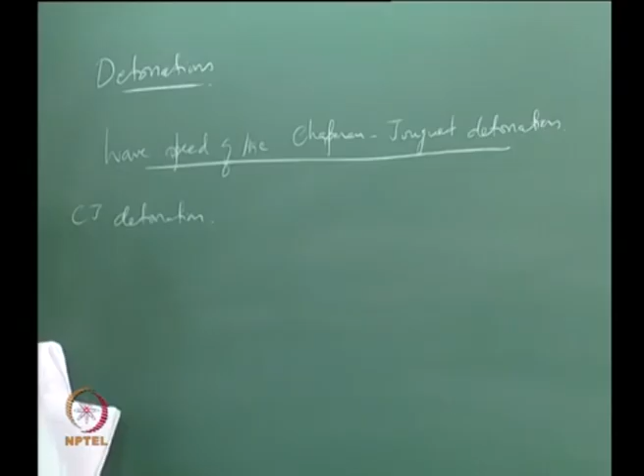We will just keep going, looking at the kind of analysis similar to Rankine-Hugoniot analysis, and then see where we can try to exploit the nature of detonation to look for the wave speed. So for the Chapman-Jouguet detonation, in this context, the product speed is basically the speed of sound.

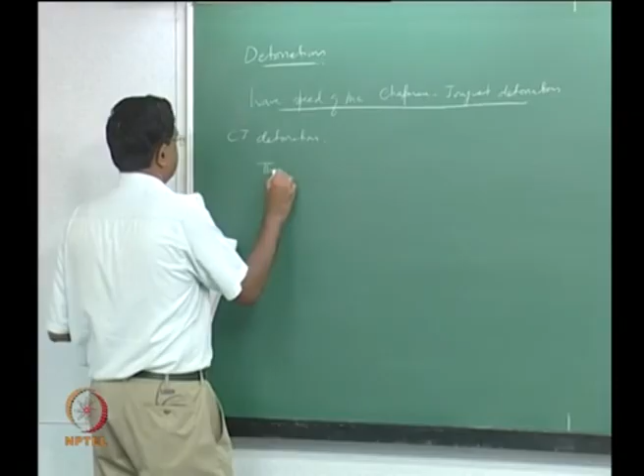So unlike, for example, in a normal shock where the downstream velocity is always subsonic when the upstream velocity is supersonic, in the case of a Chapman-Jouguet wave, the downstream velocity is always sonic, locally at the speed of sound. So the speed of sound behind the detonation wave is, using the same notation as before, A infinity equals the square root of the partial derivative of the downstream pressure with respect to the downstream density at constant downstream entropy.

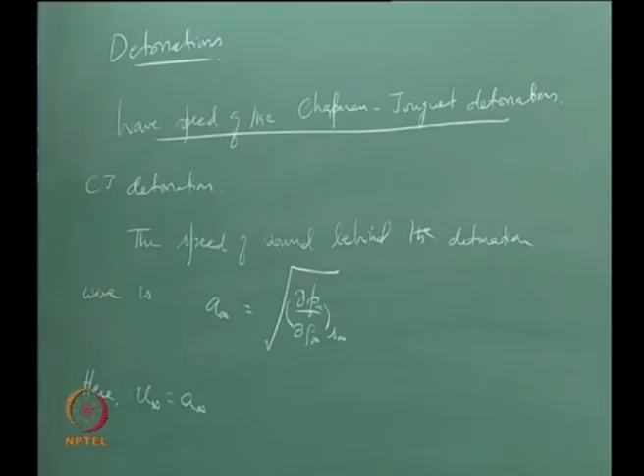Now here, u infinity equals A infinity at the upper CJ point in the Hugoniot curve. So we have m dot equals rho naught u naught equals rho infinity u infinity, which is now equal to rho infinity A infinity. So from here, u naught is equal to 1 over rho naught times rho infinity A infinity.

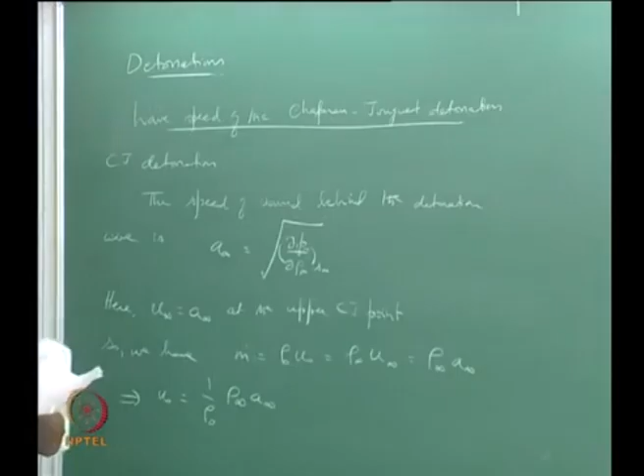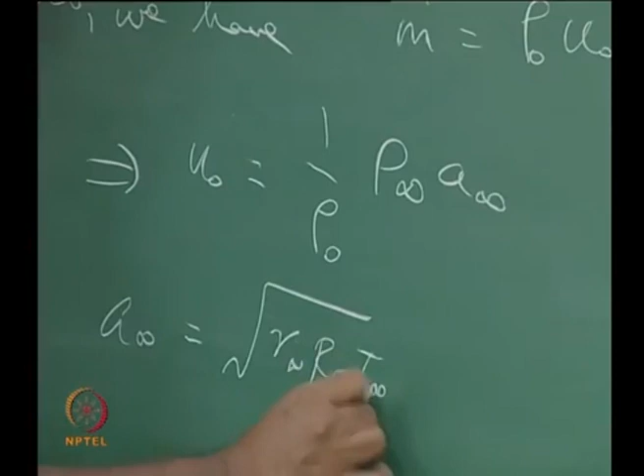Now A infinity equals the square root of gamma infinity R infinity T infinity. So u naught is equal to rho infinity over rho naught times the square root of gamma infinity R infinity T infinity, right. So let us call this relationship number 1.

So here the problem is, u naught is actually what we are looking for. This is very similar to what we did for the deflagrations. That is related to rho naught, also very similar to deflagrations, because there also we were trying to look for a relationship for m dot versus the rest, and m dot is rho naught u naught. But here what we find is the wave speed, which in a wave fixed coordinate system is essentially u naught, depends on the downstream quantities, rho infinity, gamma infinity, R infinity and T infinity, and that is the problem. So we now have to try to find out if we can evaluate those quantities.

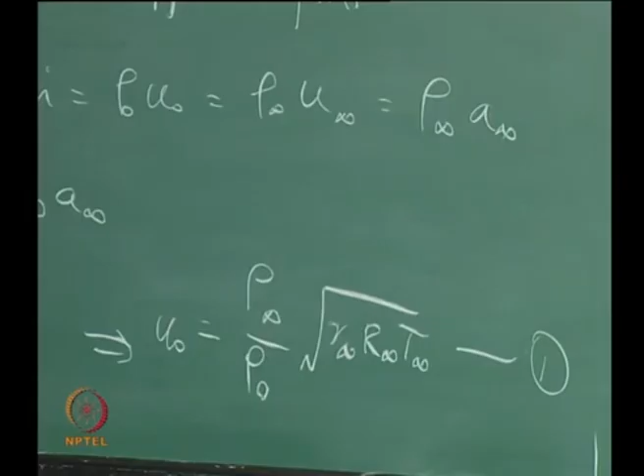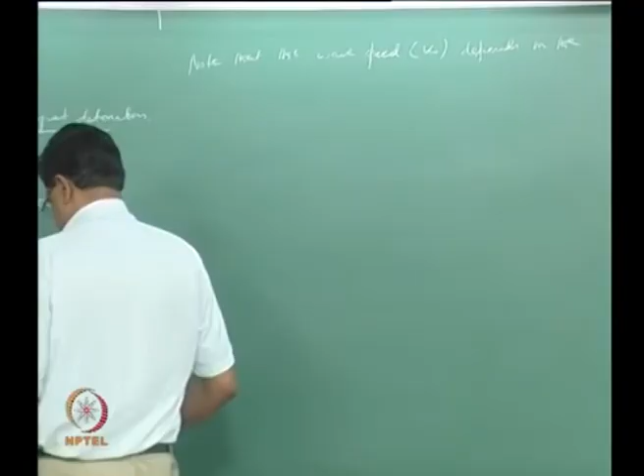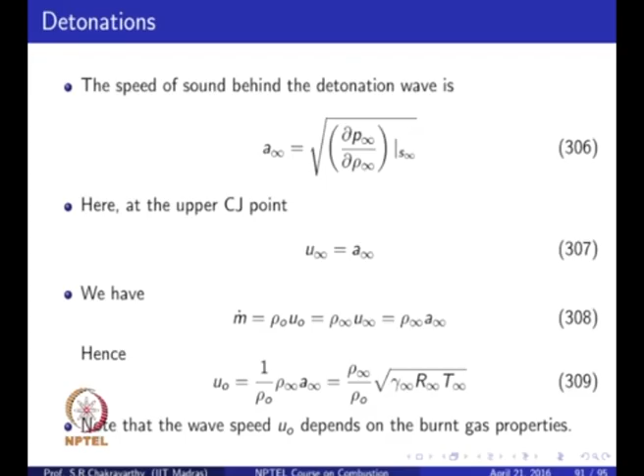So note that the wave speed, which is essentially u naught, depends on the burnt gas properties. As a matter of fact, we also know that, for example, at the lower CJ point as well, u infinity is equal to A infinity, and m dot being equal to rho naught u naught equal to rho infinity u infinity is valid regardless of where we are on the Hugoniot curve.

So if you now plug in u infinity equal to A infinity, that's valid for both upper CJ and lower CJ points. So strictly speaking, this could be a CJ detonation wave or a CJ deflagration wave at this moment. We haven't quite exploited the fact that we are particularly interested in a detonation wave at this stage. So keep that in mind and look for where we are doing this. What we want to do now is to chase the evaluation of the burnt gas properties. So let's try to do that.

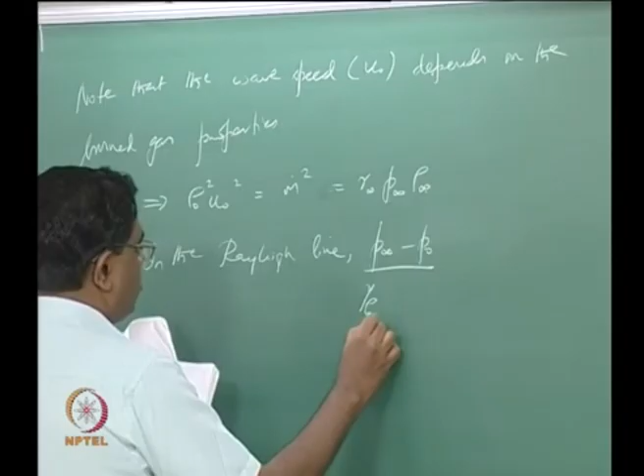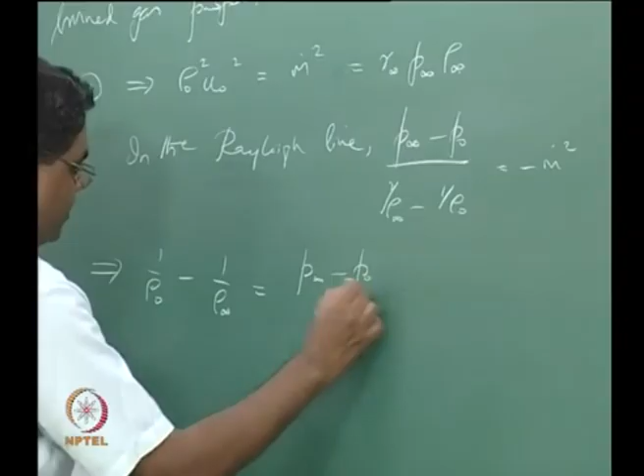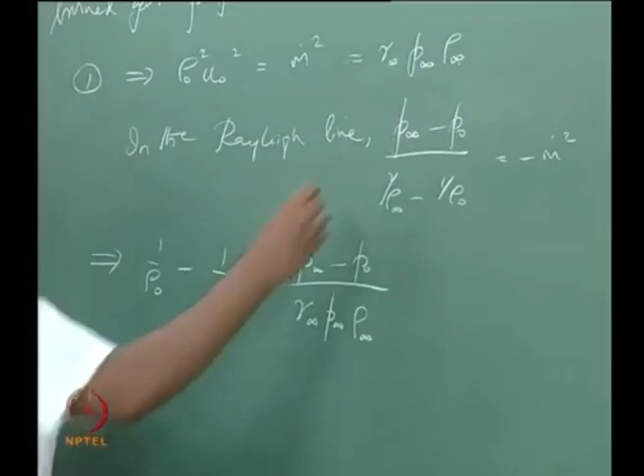One itself implies that rho naught squared u naught squared equals m dot squared equals gamma infinity p infinity rho infinity. You can get this quite easily. Now in the Rayleigh line, we have p infinity minus p naught divided by 1 over rho infinity minus 1 over rho naught equals minus m dot squared. Then we plug this in here. So from this we can get 1 over rho naught minus 1 over rho infinity; we swap this to get rid of the negative sign in the m dot squared. So that would be p infinity minus p naught divided by gamma infinity p infinity rho infinity. Let's call this 2, and this will be pretty important at some stage in the future.

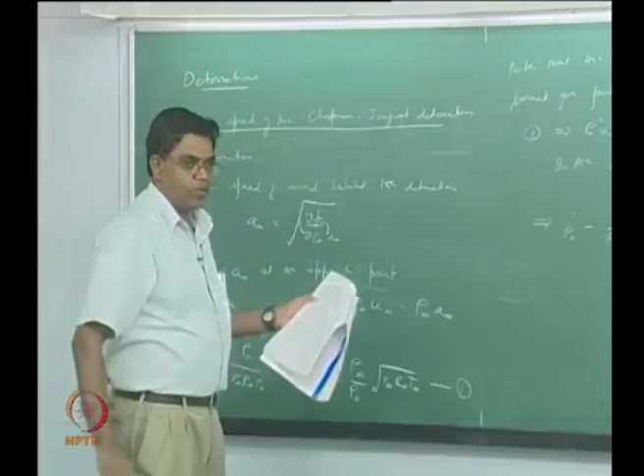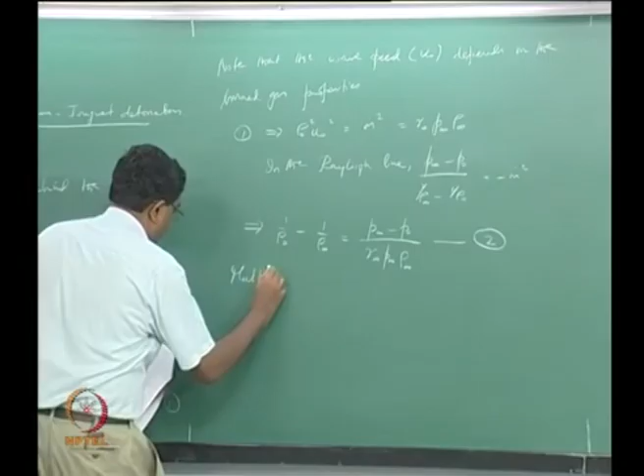From now on, we are going to do something that could be a little bit boring, but we will come back to this and say, well, we can forget about everything I said, which is complicated and boring, and just go back and look at this and see if we can exploit something here. So let me go through whatever needs to be gone through, and then we will come back to this. So here what we want to do is multiply above by p naught plus p infinity.

So we have p naught plus p infinity times 1 over rho naught minus 1 over rho infinity equals, we now get p infinity squared minus p naught squared divided by gamma infinity p infinity rho infinity.

So why did we do this? This is where we are now going to make the point that we are looking at a detonation wave. We have already made the point that we are looking at a Chapman-Jouguet wave, and we pretended to be doing detonation, but not quite yet until now. So what we want to do is to notice that across a detonation wave the pressure increases manifold, so many times, and therefore p infinity is larger than p naught, quite larger than p naught actually.

Now what we don't want to do at this step is to say that p infinity is much larger than p naught. So I used the words carefully there. I said quite larger than, not really much larger than. So if you now say quite larger than, then we can easily say that p infinity squared is much larger than p naught squared. So what we are going to do right now is to say, suppose p infinity squared is much larger than p naught squared.

This is much less of an approximation when compared to directly supposing that p infinity itself is much larger than p naught. Okay, so this is all right. But what we will find is this is not going to really help us directly. It's going to lead us to go into some circles, and then we will come up with an iterative scheme of solving this. So that's the boring part that I was just talking about.

And then I'm going to come back and say, wait, for an engineering purpose, can I relax and say I don't want to actually multiply by p naught plus p infinity here and then get p infinity squared to be considered to be much larger than p naught squared. Directly in 2, can I say p infinity itself is much greater than p naught, instead of looking at the squares. I'll do that quite some time later.

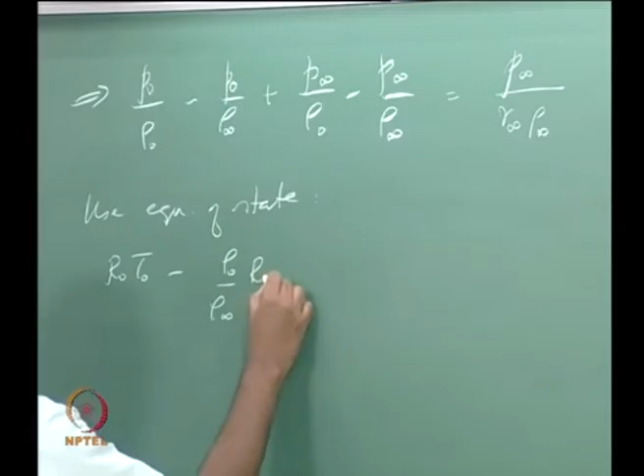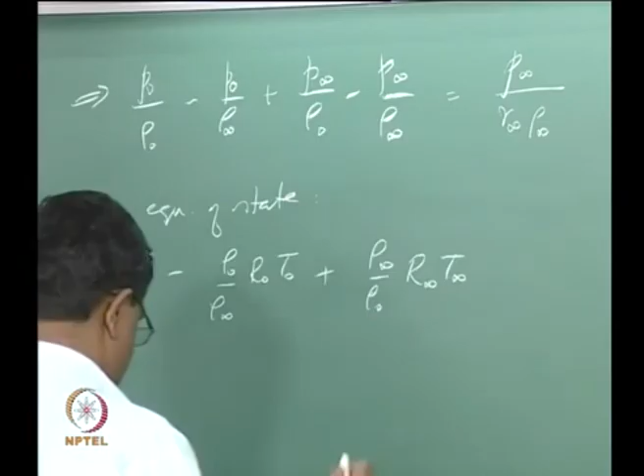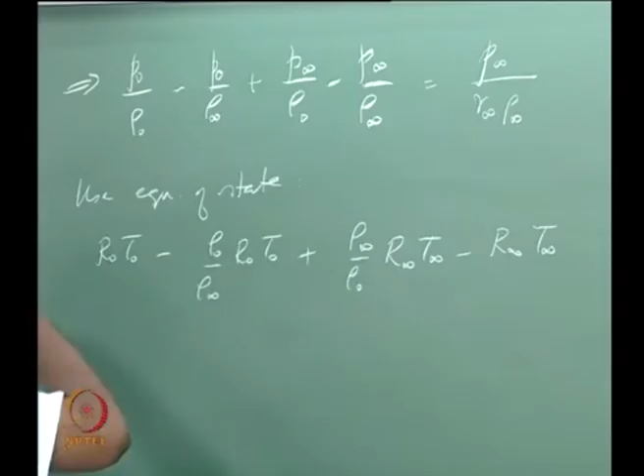R naught T naught minus rho naught over rho infinity R naught T naught plus rho infinity over rho naught R infinity T infinity minus R infinity T infinity. Wherever we have p infinity over rho infinity, we use R infinity T infinity; p naught over rho naught, we use R naught T naught. But for the mixed quotients, we take the ratios of densities and use the equation of state wherever applicable, so on the right hand side we also write R infinity T infinity divided by gamma infinity.

So multiply, this is the kind of boring part I was talking about, it's basically some algebra. Rho naught divided by R infinity T infinity, and that's going to get you a quadratic. You might recall doing something like this with the Hugoniot curve and the Rayleigh line put together earlier on to get the upstream Mach numbers, but here our goal is slightly different.

So we get rho infinity over rho naught the whole squared minus (1 over gamma infinity plus 1 minus R naught T naught over R infinity T infinity) times rho infinity over rho naught minus R naught T naught over R infinity T infinity equal to 0. Let's call this 3.

Now this is a quadratic in rho infinity over rho naught, right. But you see, what are the coefficients? The coefficients involve gamma infinity, R naught, T naught, R infinity, T infinity, right. So those are the coefficients there. So solving this will give rho infinity over rho naught in terms of gamma infinity, R naught, T naught, R infinity, T infinity, right.

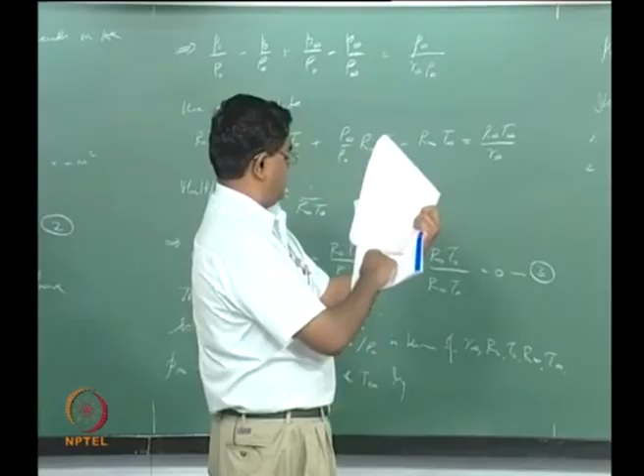The reason why we number these equations is we will now go through an iterative solution procedure. The first thing we do is assume a P infinity. We don't know what P infinity is, but let's assume it. And did I make a mistake? Right. P equals rho RT, so we need to have P infinity equals... is that right? I want to make sure I don't make that mistake, but I did. So assume T infinity. 3.

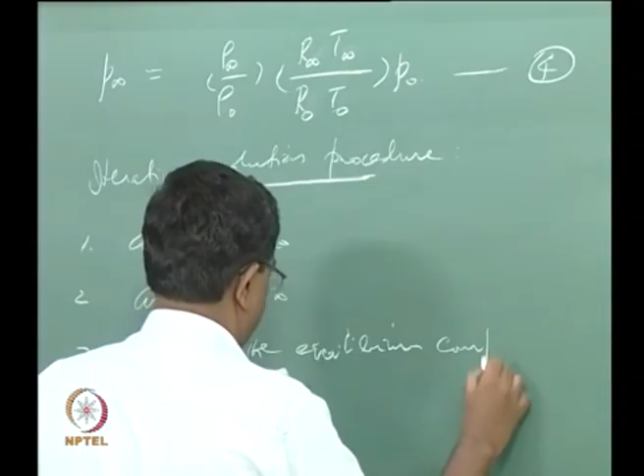Now the next thing we do is calculate the equilibrium composition Yi infinity based on P infinity and T infinity. That is, once you get to step 3 you have a P infinity and T infinity to work with, which you now use for the equilibrium composition there. And then once you do this you use the energy balance to check whether this is going to resolve things. So check for E infinity from the Hugoniot relation.

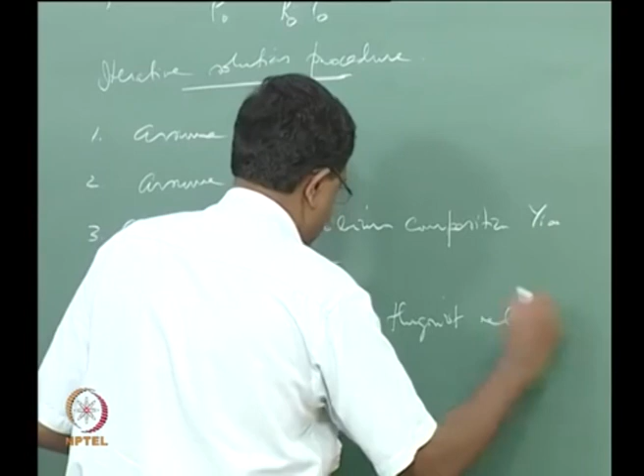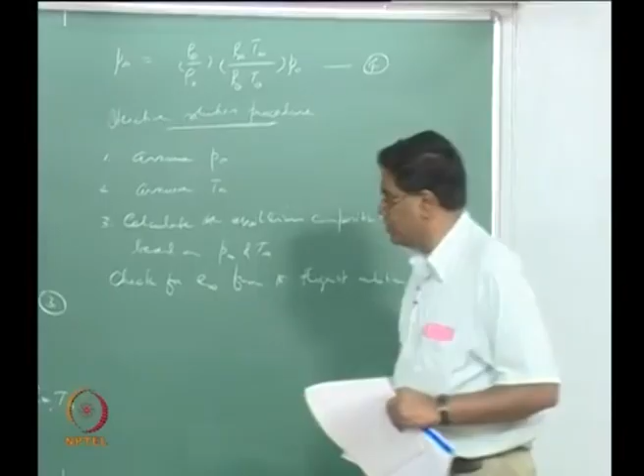In fact we had the mass balance here, and the Rayleigh line is a combination of statements of mass conservation and momentum conservation. That is what we have been working with. We have never used energy conservation yet, so we will try to use that as a check, right. So we will try to use the Hugoniot relation. We had H infinity minus H naught equals 1/2 (1 over rho infinity plus 1 over rho naught) times (P infinity minus P naught).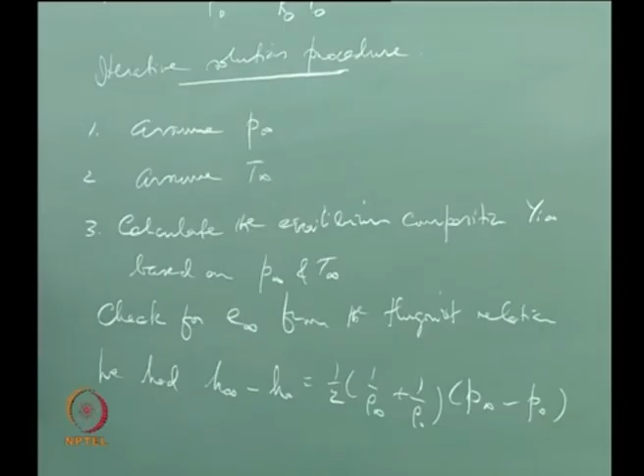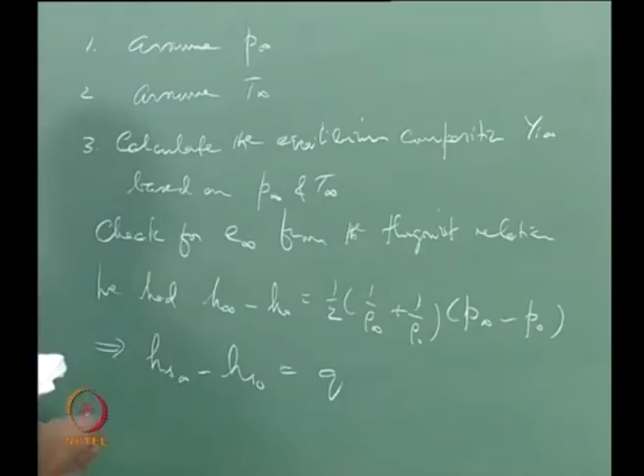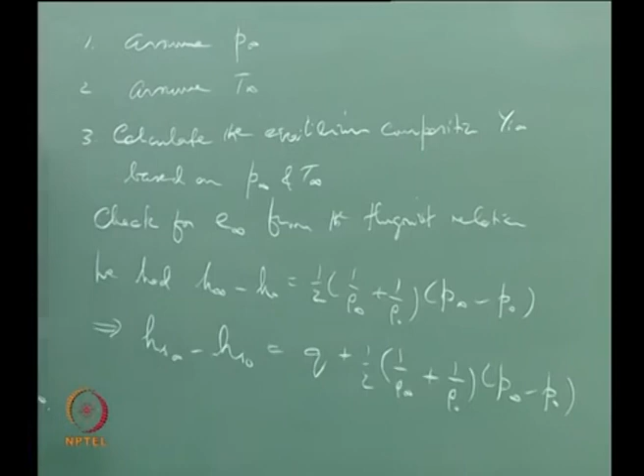Which means the sensible enthalpy part of it, Hs infinity minus Hs naught. So what we do is we now split this into the sensible enthalpy and heat of formation. The difference in the heats of formation of the products and reactants altogether is the heat release, right. So that is Q, so that would be Q plus 1/2 (1 over rho infinity plus 1 over rho naught) times (P infinity minus P naught).

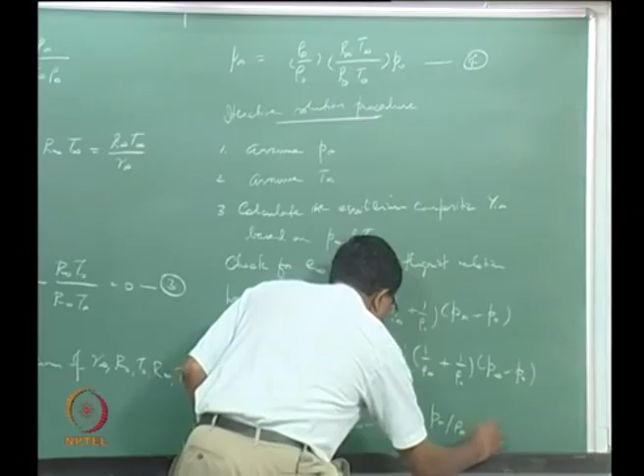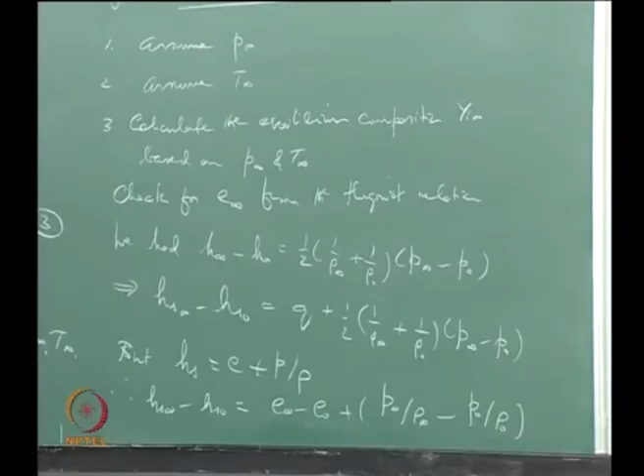Here then we want to use the internal energy. The sensible enthalpy Hs is equal to internal energy plus P over rho. Therefore Hs infinity minus Hs naught equals E infinity minus E naught plus P infinity over rho infinity minus P naught over rho naught. Okay, let's now substitute this in the Hugoniot.

Then we get E infinity minus E naught equal to 1/2 (1 over rho infinity plus 1 over rho naught) times (P infinity minus P naught) minus P infinity divided by rho infinity plus P naught divided by rho naught plus Q. Simplify this, you have some opportunity to cancel things, therefore we get E infinity minus E naught equals Q plus 1/2 (P infinity plus P naught) times (1 over rho naught minus 1 over rho infinity).

So here we can now go back and use relationship number 2, and what do you get? You get a P infinity plus P naught over here. But then if you now use 1 over rho naught minus 1 over rho infinity as this, you naturally get a product of P infinity plus P naught times P infinity minus P naught, which will lead to P infinity squared minus P naught squared, right.

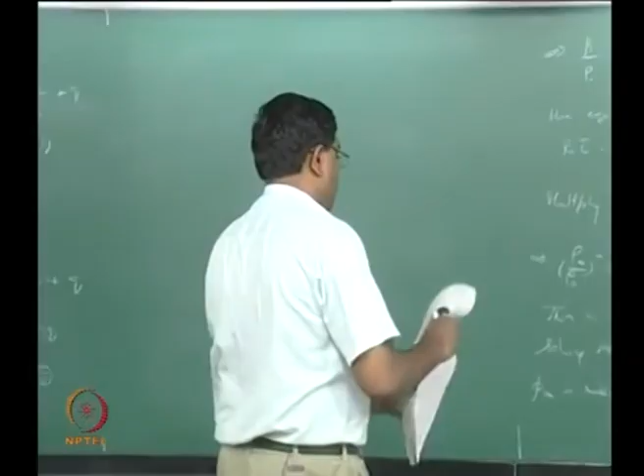So if you call this 5, then we have assumed a T infinity. So the equilibrium composition is also now going to give you a gamma infinity and R infinity, right. So now you have, for the assumed value of P infinity and T infinity, you get gamma infinity and R infinity, with which you can check if the above equation is satisfied, right. So once you know that this is satisfied, you're okay with the choice of T infinity that you made in step 2. Of course you still have the outer loop of having assumed a P infinity.

So this is step 3 that we have just finished. Step 4 would be solve for rho infinity over rho naught using the quadratic equation, that's number 3, right. And step 5 would be find P infinity from 4, that's here. Then 6, check if this is the same as assumed.

So whenever we say check, we would like to think about two things. One, it's always within a certain tolerance. So you're not going to exactly match, maybe you can match to the first decimal place, second decimal place, third decimal place, or as a percentage, whatever it is. You want to hold to a tolerance, and if it is satisfied then you proceed. If not, then you have to repeat the inner loop.

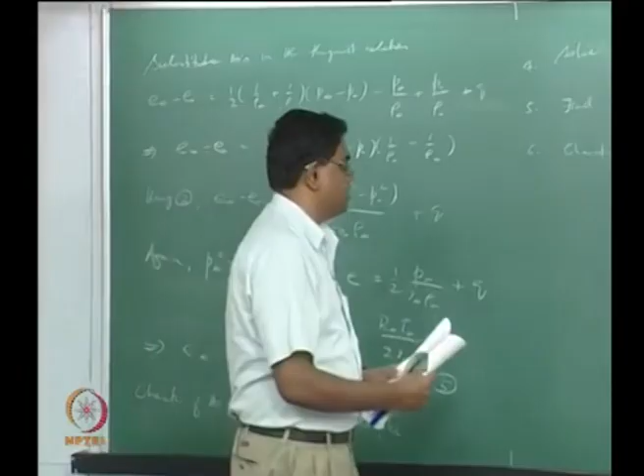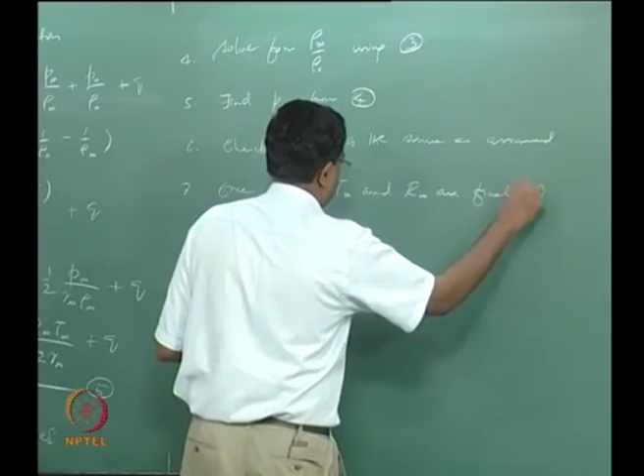So finally step 7 would be, once P infinity, rho infinity, T infinity and R infinity are finalized, use 1 to find U naught. That's almost like the post processing. Now of course we find that there's kind of a loop within a loop, and it's going to take a while for you to converge.

So instead of going through this, the next best thing that you can do, as I pointed out earlier, is don't push yourself to assume P infinity squared is much greater than P naught squared. Directly say, can I adopt P infinity itself as much greater than P naught. So a good approximation is to directly use P infinity itself as much greater than P naught in 2. That's what I said we will go back to.

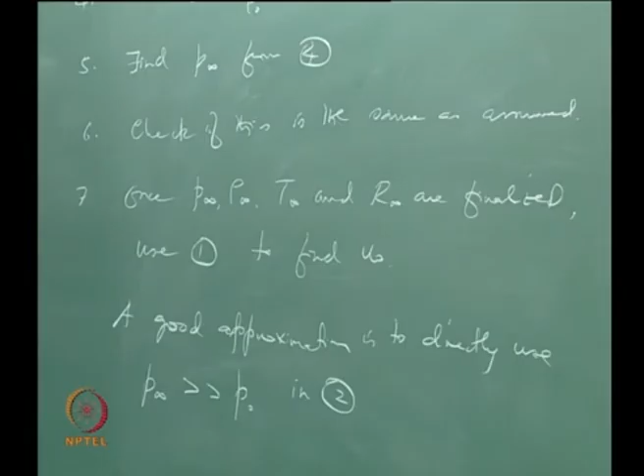So that implies 1 over rho naught minus 1 over rho infinity equal to, we earlier had P infinity squared minus P naught squared divided by gamma P infinity rho infinity. We threw away P naught squared in preference to P infinity squared, cancelled one of those P infinities at the top with one at the bottom and so on.

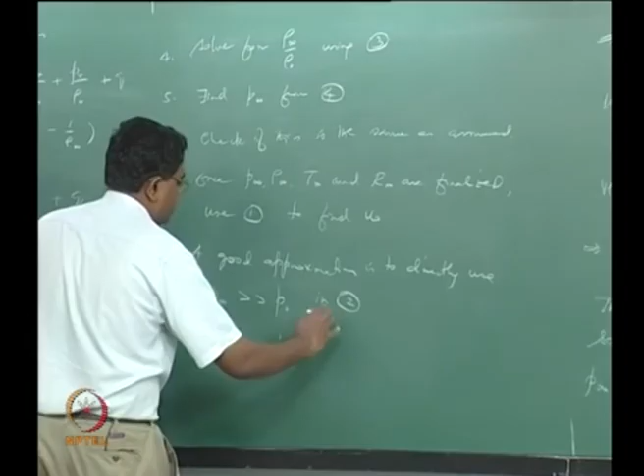But now we have P infinity minus P naught divided by gamma P infinity rho infinity; P naught is thrown away in comparison with P infinity. The P infinity directly gets cancelled with the one at the bottom, so you're left with only 1 over gamma infinity rho infinity. So this means that rho infinity over rho naught is simply equal to gamma infinity plus 1 divided by gamma infinity.

Hs infinity minus Hs naught equal to q plus 1/2 P infinity minus P naught times 1 over rho naught plus 1 over rho infinity. In fact, we've just written it here, still around.

So here what we want to do is something that we did during the Rankine-Hugoniot days, that is, we want to write this as gamma infinity over gamma infinity minus 1 P infinity over rho infinity minus gamma naught divided by gamma naught minus 1 P naught over rho naught. The way we get this is we now say Hs infinity is Cp infinity T infinity. Cp infinity is gamma infinity R infinity divided by gamma infinity minus 1, and then you had a T infinity. R infinity T infinity is P infinity divided by rho infinity. Similarly for the naught conditions.

So all these things are of the order of 1. And mostly for mixtures of gases in both cases, it's going to be in general a polyatomic system, so we don't expect a big difference between gamma infinity divided by gamma infinity minus 1 and gamma naught divided by gamma naught minus 1. So from an order of magnitude point of view, just like how we threw away P naught as opposed to P infinity, we now say let's get rid of this entire term. And similarly wherever we find P infinity minus P naught, you now get rid of P naught.

So with this we now say gamma infinity divided by gamma infinity minus 1 times P infinity minus 1/2 P infinity times rho infinity divided by rho naught plus 1 equals rho infinity q. Some more simplification: you can pull out P infinity, and then plug in rho infinity over rho naught as gamma infinity plus 1 divided by gamma infinity. So you'll now have one big function in terms of gamma infinity.

So quickly going through that, divided by gamma infinity minus 1 minus half gamma infinity plus 1 divided by gamma infinity plus 1, equal to rho infinity q, and then you put things together. So we get P infinity times gamma infinity plus 1 divided by 2 gamma infinity times gamma infinity minus 1 equals rho infinity q. But keep in mind that this still has remnants of rho infinity over rho naught, and this rho infinity then gets cancelled. So then you get P infinity equal to 2q rho naught times gamma infinity minus 1.

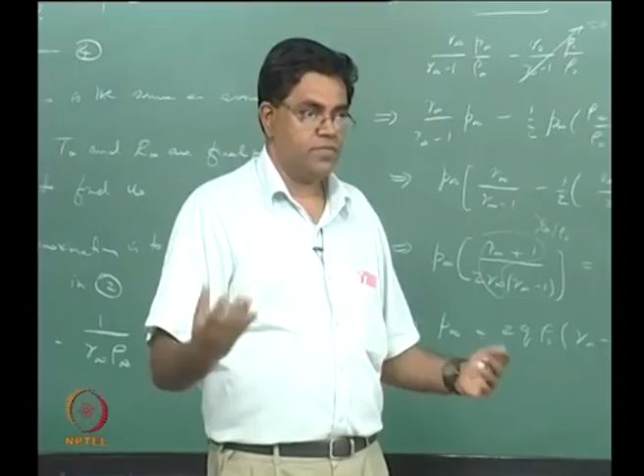In fact we have been exploiting the notion that the pressure itself is much greater than the initial pressure, and that's really the hallmark of detonation waves. So what's actually great about detonation waves is not as much about the kilometers per second kind of velocities, but what is utilized in a detonation wave in terms of applications is the pressure.

So you have this huge pressure build up behind the wave, and as the wave propagates it now has a rarefaction that follows it, which sucks everything in and then destroys the materials, or the matter, that it passes through.

So here we are actually talking about gases all over, but if you now think about reactants that were in solid form and correspondingly gave rise to some heat, the solid evaporating and then reacting, giving rise to the detonation wave in the gas phase, then the volumetric heat of the reactants is a lot higher, and therefore solid detonation reactants give rise to a much higher increase in pressures.

So you get this physically meaningful relationship from making this approximation here and proceeding instead of getting stuck in this iterative loop. So finally, we want to go back to 1 and say U naught is equal to 1 over rho naught square root of gamma infinity P infinity rho infinity. That can be written as 1 over rho naught square root of gamma infinity P infinity rho infinity over rho naught times rho naught,

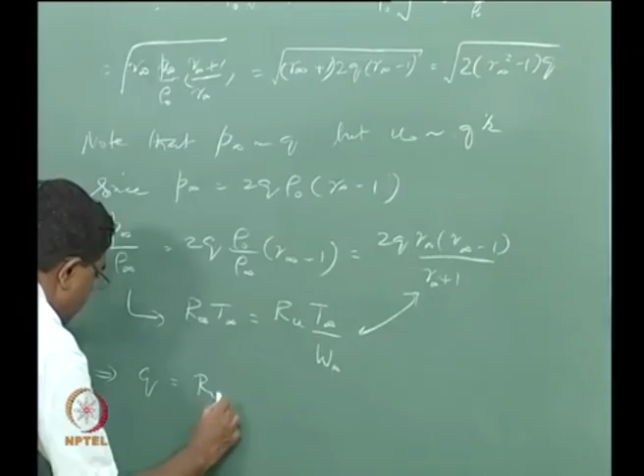P infinity over rho infinity, to start with, is nothing but R infinity T infinity, which is RU T infinity divided by W infinity. So from here we can get Q, putting these two together. Q is RU T infinity divided by W infinity times 1/2, gamma infinity plus 1 divided by gamma infinity times gamma infinity minus 1.

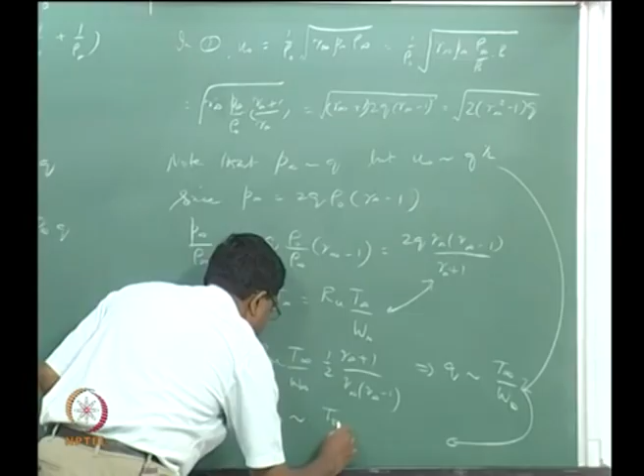So from here what we can see is Q goes as T infinity divided by W infinity, and then putting these two together, we have U naught essentially goes as T infinity divided by W infinity to the half.

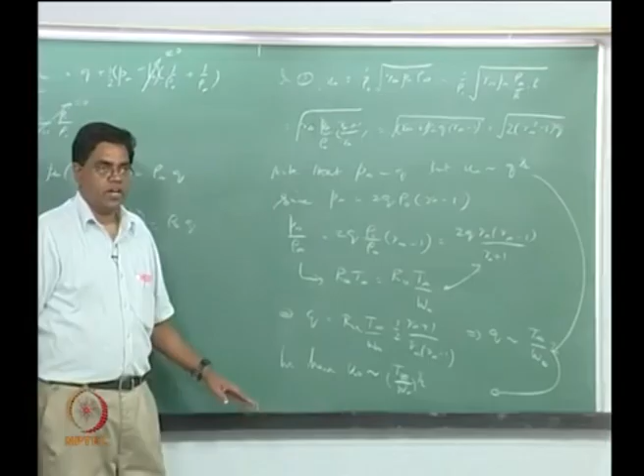Now for those of us who are familiar with rocket propulsion, we get a very similar result for the exit velocity of the rocket from a gas dynamic nozzle supplied by combustion gases at a temperature T infinity and molecular weight of gases being W infinity. And this is what translates to something called a specific impulse.

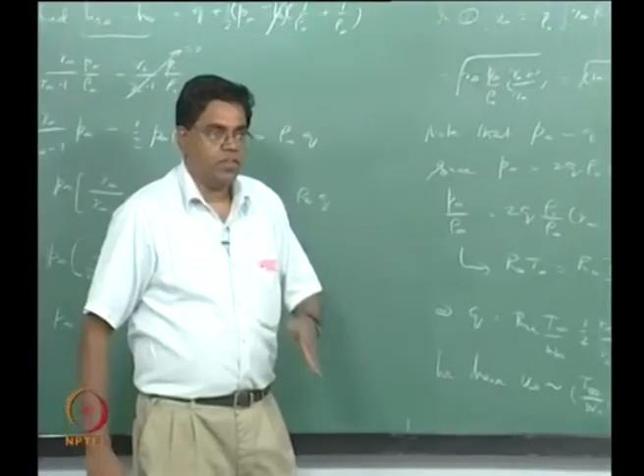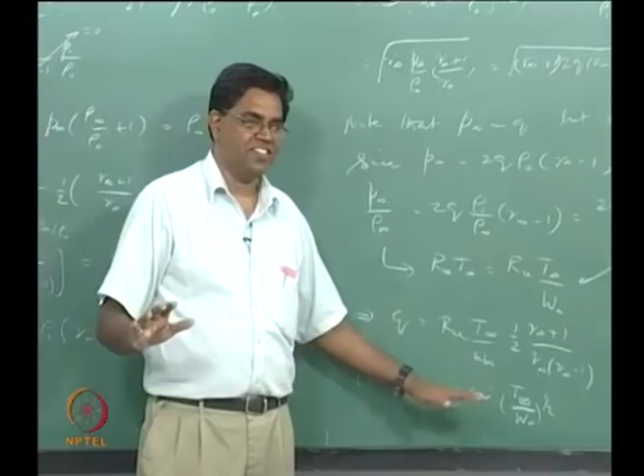Now if you have a pulse detonation engine, the detonation wave keeps on propagating out at this speed, and what we find is that the speed of the wave is also directly proportional to T infinity divided by W infinity to the half, the same dependence. So effectively a pulse detonation rocket engine is not going to have a specific impulse that is way too different from an ordinary chemical rocket. So there is no way of beating around nature in this case. We are pretty much going to get the same result as we can see from this.